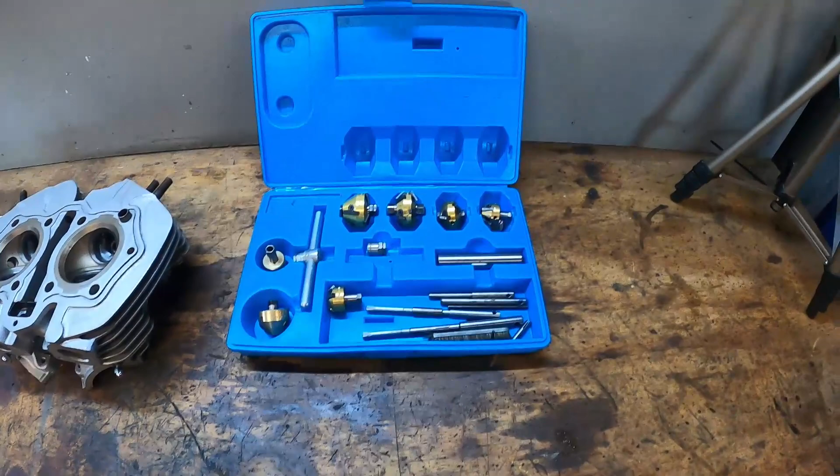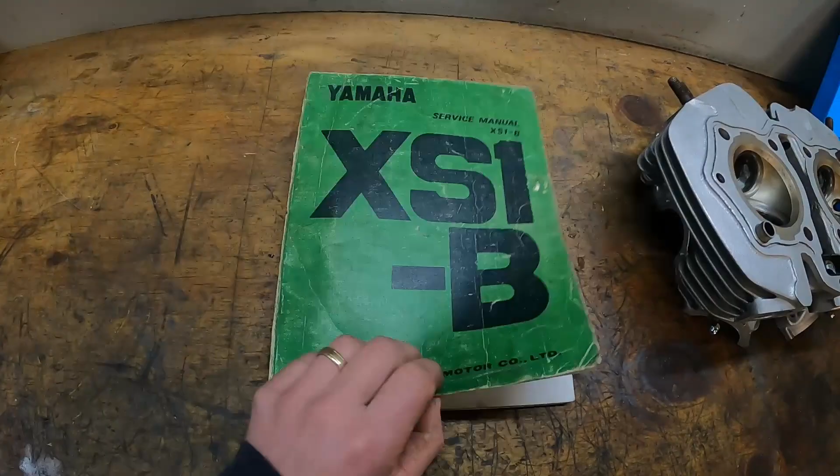Alright, to do this we've got the valve seat cutters. Now this is a set that my dad gave me. He bought it in the early to mid 70s. I've tried to pick a set up recently and everywhere I go just looks at me stupid and then tells me that I have to go to a machine shop. So I'm super stoked that Dad gave me these. We've got the head obviously, and we've got the factory XS1B manual. Now this is the original manual from the 70s.

Alright, so you can see in the factory manual you've got a diagram of the valve pocket, and that's got three profiles. You've got A here, which is a radius profile, C, which is the valve seat itself, and that's got a 45-degree profile, and then B, which is the throat, and that's got a 65-degree profile.

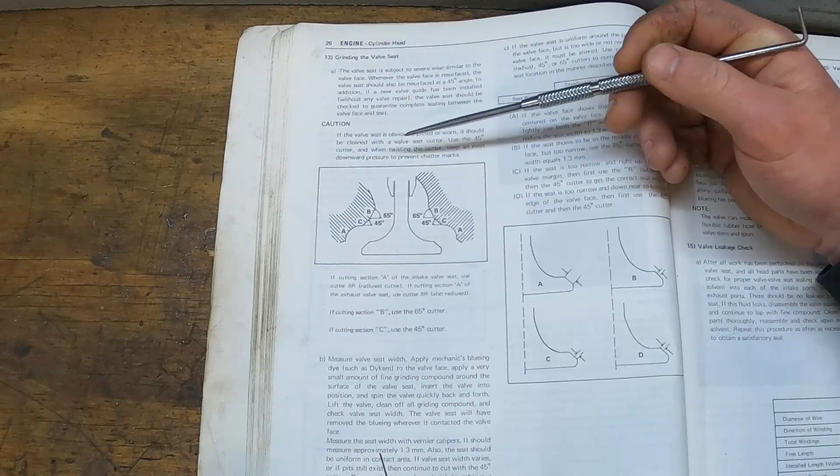Now when you recut the seat, two things happen. You remove material and the diameter of the seat itself gets wider, and also the width of the seat gets wider as well. Alright, so we want to maintain the same diameter and we also want to maintain the same width, which is 1.3 millimeters. So to do that, once we've recut it, we recut this profile, which will bring the diameter back in, and recut this profile, which will bring the width of the seat back in as well.

Now the problem I've got is I don't have a radius cutter. So what I'm going to have to do is remove as little material as possible and hope that the valve seat doesn't get too wide and that I'm still able to achieve a good seal.

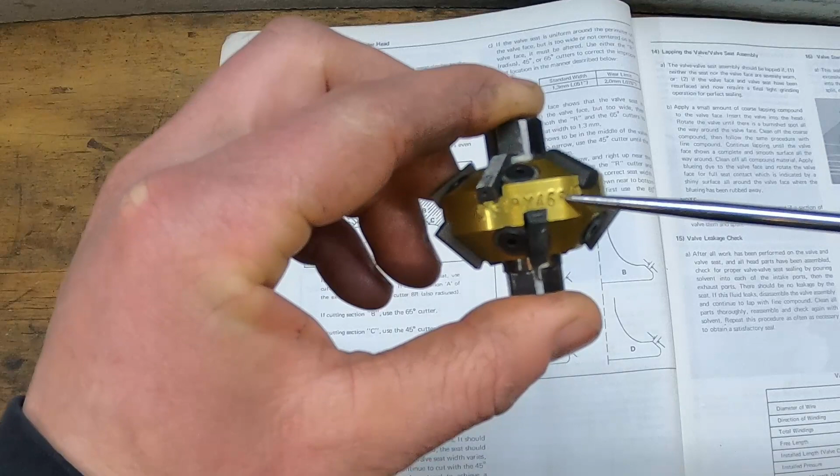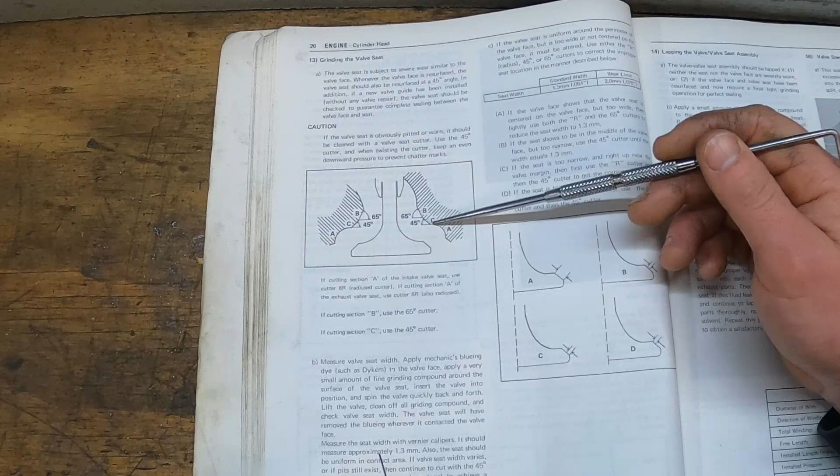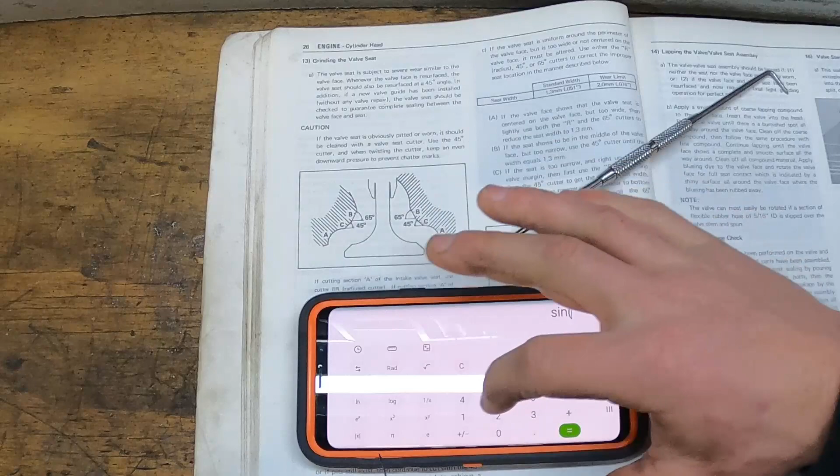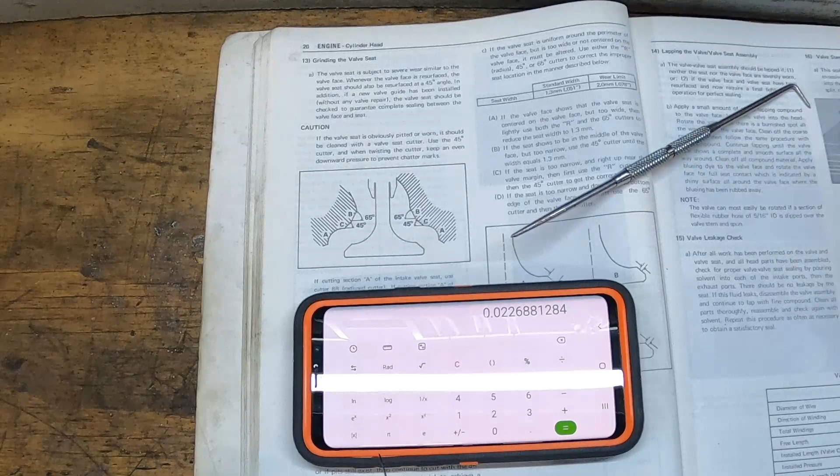Alright, so for the valve seat itself, I've got a 46-degree cutter. Now I'm not really too concerned about it being 46 and this being a 45. The reason it's 46 is because the company that manufactured these recommends an interference fit. So they reckon that if the outer profile of the valve has more pressure than the inner, you'll get a better seal. So if I do the calculations, 1 degree over 1.3 millimeters equals 0.0227 of a millimeter, which is nothing that a couple of turns of the lapping tool isn't going to take off anyway. So not a big deal.

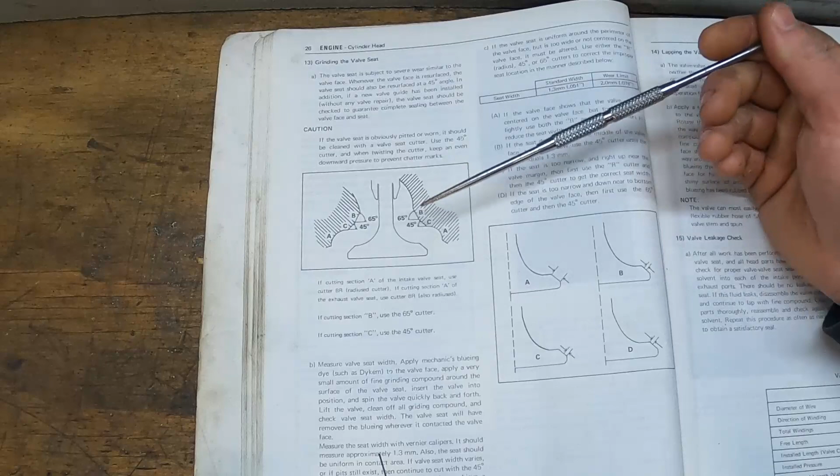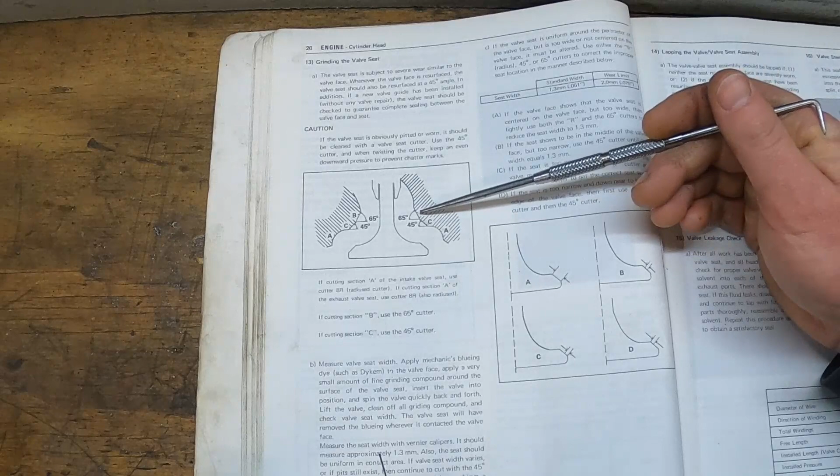As far as the throat goes, I don't have a 65-degree cutter, but I do have a 60-degree cutter. That's not a big deal because that's not a contact surface or anything, so I can just recut that to 60 degrees. Right, so I'm going to cut the exhaust port first. Now you can see here, this is the valve seat itself, and you can see all that pitting around there. So I'll run the cutter over it and I'll give you another look and we'll see how it goes.

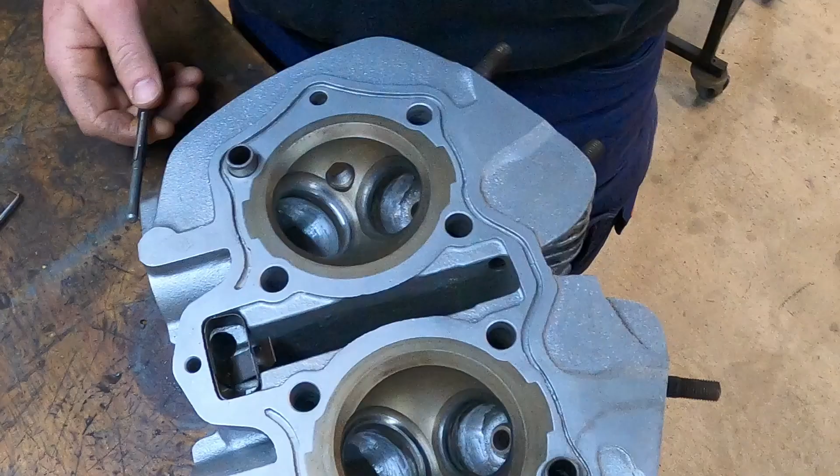Right, so first we'll take our expandable pilot and we'll put that into the valve guide. Now the instructions for the valve seat cutters say you want about a 2 or 3 mil gap between this shoulder and the valve guide, so you only want this expandable section to be contacting the valve guide. Hand in hand with that, this whole thing wants to be inside the guide as well so you don't damage the expandable portion. I've already checked it out and it fits perfectly.

Then I'm going to take my 45-degree cutter, place that in there, make sure the blades are all the right width. I'm going to have to adjust these blades. They need to come out slightly. See how that goes. That's better. Alright, let's see how we go with that.

That one was nice and easy. That's done. I'll just cut the throat for a few turns. Alright, this is a much better example. Once again, probably hard for you guys to see, but there's the change. The valve seat itself is about 1.3 mil, and I've just recut the throat.

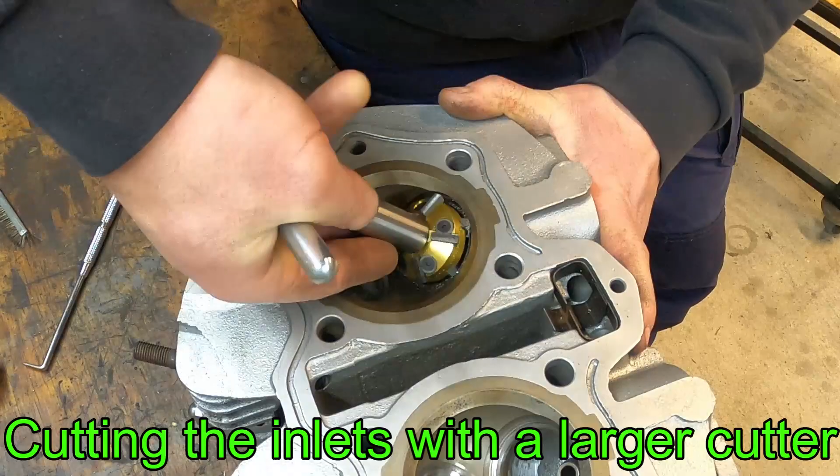Alright, so I don't know how I didn't pick up on this before, but this valve is bent, which is probably the reason why this valve seat was the worst, because it was never closed. And also probably the reason that the bike was just left out in the weather to rot for so many years. But that's all right. I think I've salvaged the valve seat, and I've found this exhaust valve in amongst all my spare parts, which is in pretty good nick and isn't bent. So what I'm going to do now is lap them all in, put the head back together, and she should be good to go.